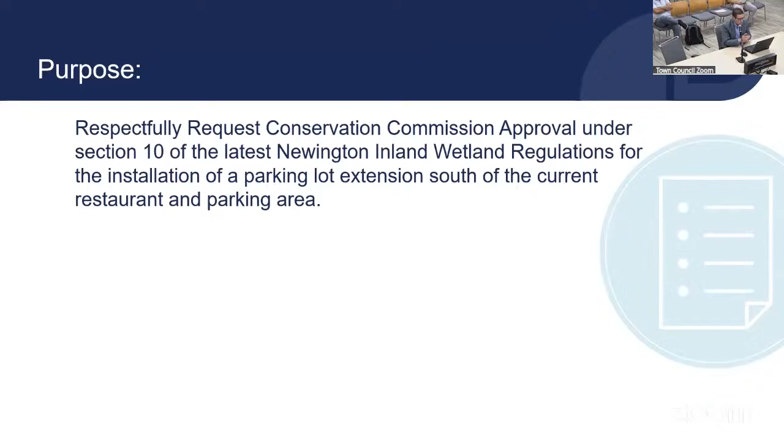Again, for the record, my name is Francis Vacca from the BSC Group in Glastonbury, Connecticut. And again, we are here tonight for additional discussion on Casadoro, Newington, the parking lot extension. And again, the purpose, to reiterate, is to respectfully request Conservation Commission approval under Section 10 of the Newington Inland Wetland Regulations.

Tonight, I am going to go through some information that was discussed at the previous meeting. I'm going to show the added site trees; that was a requirement of planning and zoning for the site, but it's relevant to this discussion. I have tree and wetland opinions. I call them out as an assessment, but they are opinions from the professionals in my company, both a landscape architect and a professional wetland scientist, with regard to the wetland area.

And I will close by briefly updating the commission on the updated parking and the updated wall layout based on conversations and discussions at the previous meeting. Again, we're discussing the portion of the property to the south of the main Casadoro restaurant, the pad site, again, to define pad site, a potential future site that would be usable for commercial development on the Berlin Turnpike, and then the wetland associated with the rear portion of the property.

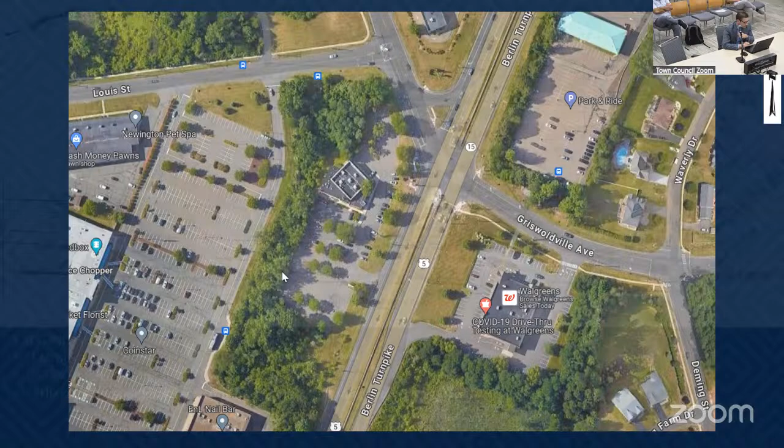The existing size of the site is 3.56 acres with the existing building and 109 parking spaces. And again, the orange line identifies the previously disturbed area. This plan is new. You haven't seen it. All of the circles that you see with the call-outs are identifying the trees. A representative from BSC Group went on site with a GIS identifying device and identified 53 trees that are 6-inch caliper or greater. They're identified as seen on this plan. It has been included in the site plan, I should say.

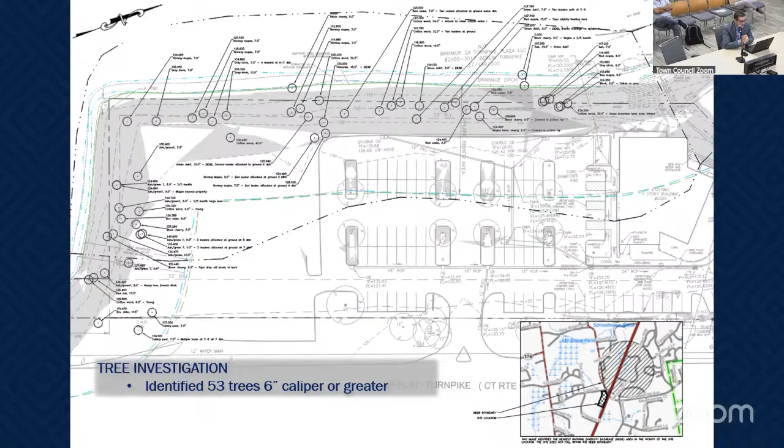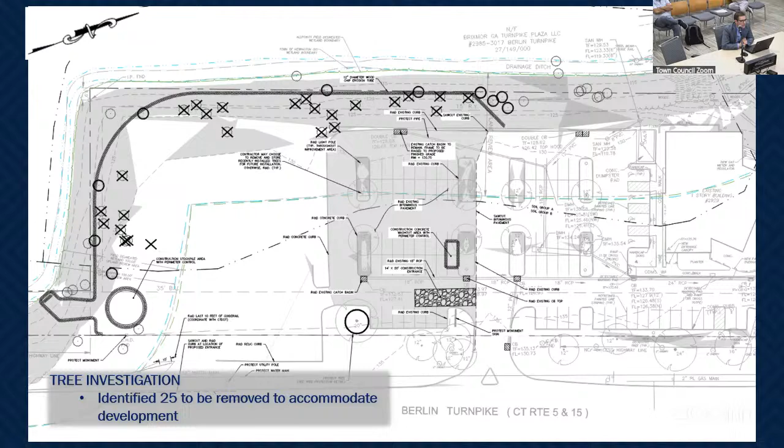For the proposed development, I'll speak a bit further on the design of the wall changes later in the presentation, but we are proposing 25 of the 53 trees to be removed to accommodate the proposed development. They're identified here by the X's. The plan itself shows a bit more information on what those trees specifically would be. There is no specific decision as to which trees. It's essentially the ones that would be associated with the disturbance.

With regard to the wetlands, I have with me this evening Mr. Jonathan Kuziel, who's a professional wetland scientist. He actually was the one that performed the investigation of the trees. So he was out there and took the tree count. But as a professional wetland scientist, I also asked him to provide an opinion associated with his interpretation of the wetland itself to provide additional feedback to the commission.

I apologize, I did not have time to get this email into the record, so I'm going to read it into the record here. And again, I have Mr. Kuziel here as well to answer any questions associated with the wetland itself. So this is an email to me from Mr. Kuziel. To whom it may concern.

The wetland is situated approximately along the northwest perimeter of the Casadoro property in the form of a linear ditch. It functions as a stormwater retention and conveyance feature during rain events and snowmelt from the surrounding development. The ditch appears to be hydrologically connected to both the larger wetland complex south of the Berlin Turnpike and another complex north of Louis Street. Such connections suggest that some of the functions and values of those larger wetland resources may also apply, although in a limited capacity, to the ditched area.

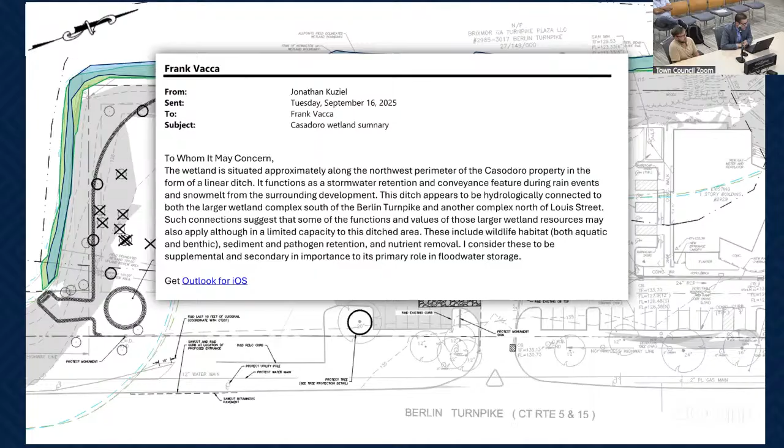These include wildlife habitat, both aquatic and benthic, sediment and pathogen retention, and nutrient removal. I consider these to be supplemental and secondary in importance to its primary role in floodwater storage. I also added one additional email, with specific relation to the trees. I understand that the majority of the concern at the previous meeting regarded the trees. So I asked one of my licensed landscape architects to examine the trees and the information provided on those slopes.

And if I may add this into the record, Frank, this is an email from Tuesday, September 16th from Jesse Harris. He's a professional landscape architect licensed in the state of Connecticut. "Frank, after examining the trees along the bordering slope portion of the site and the proposed design, I would like to offer the following thoughts. As part of the proposed site improvement, several trees within the buffer have been identified for removal.

These trees exhibit conditions that limit their suitability for long-term retention, including poor health, invasive status" — pardon me while I pronounce this — "Ailanthus altissima," I believe it is, which the common name of that is the tree of heaven. It is an invasive species, and there's a large stand of it located on the south portion of the property.

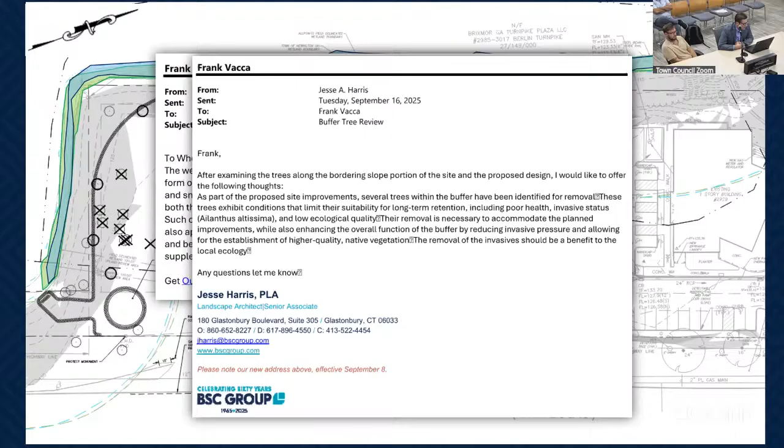"And low ecological quality. Their removal is necessary to accommodate the planned improvements while also enhancing the overall function of the buffer by reducing invasive pressure and allowing for the establishment of higher quality native vegetation. The removal of the invasives should be a benefit to the local ecology. Any questions? Let me know."

I also would like to add that this was part of the original soil assessment provided prior to even meeting in front of the commission. This came from the wetland delineation, and I'm just pointing out that there is a comment provided as far as the class for the wetlands that the understory is generally dominated by invasive species, which I just wanted to bring to the attention of the commission from the soils report.

Commissioner Paswich, I noticed that you have your hand raised. Yes, I want to speak to the tree species. If you know, are there any cottonwood trees on that site in that area you're speaking to? I believe there are 2 to 3 of the cottonwoods in that area, but I did coordinate that with my landscape architect, and he said they are getting close to the end of their useful life and will eventually, if not very quickly, turn into hazard trees that could potentially fall at some point, either to damage any trees that are currently existing there or any potential future development.

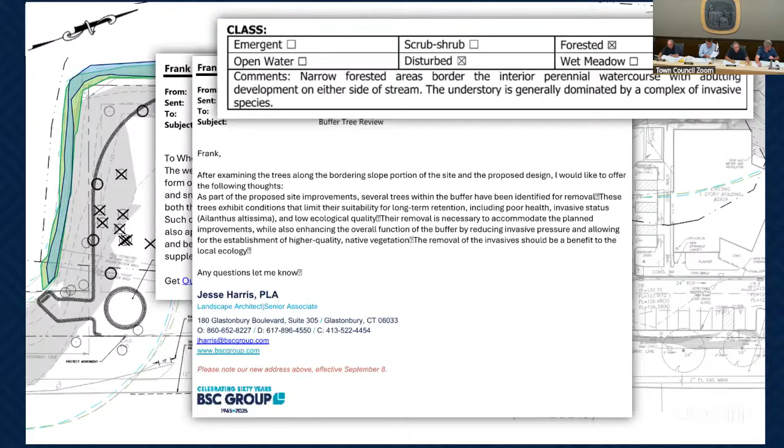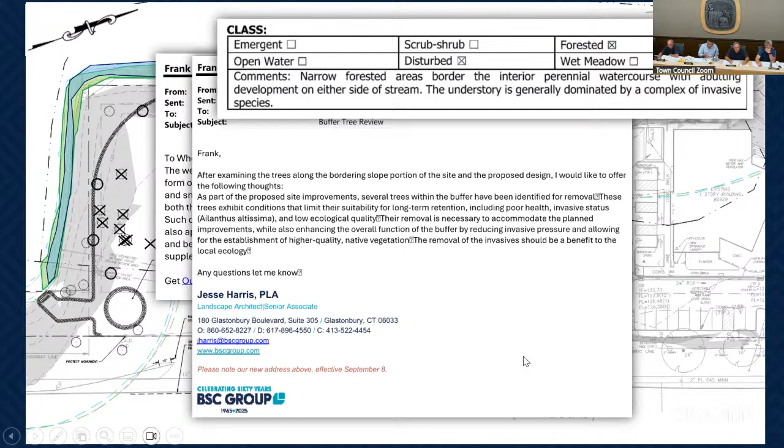Can I respond to that, Commissioner Zellick? So to address Commissioner Paskowitz's question regarding the wetlands, historically, you do have a wetlands report that you submitted with the first session that we had. Do you have this online, this photograph? Yes, I have access to that. Give me one second so I can bring that up for the commission. Sure. I think this will help Commissioner Paskowitz. I have it right here. I will enlarge this area.

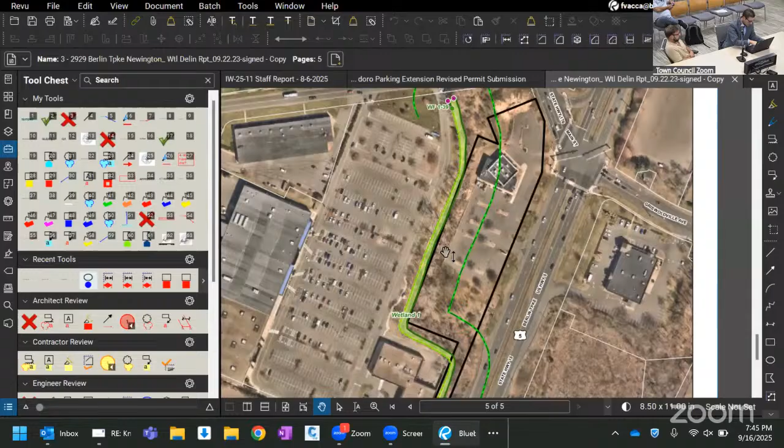Okay, so for all intents and purposes, the Berlin Turnpike, let's assume it runs north and south. Across from the Casadoro property, just to the southeast, there's a large wetland on the other side of the Berlin Turnpike. So my assumption is that wetland exists because of the Candlewick neighborhood slopes. I believe Commissioner Siddell, you live in that area. Yes, I do. There are some tributaries that probably run into this larger wetland down on the Berlin Turnpike. And I would assume that a lot of this area was wetland at one time, if I'm just looking at this map and I see that isolated wetland that's there now.

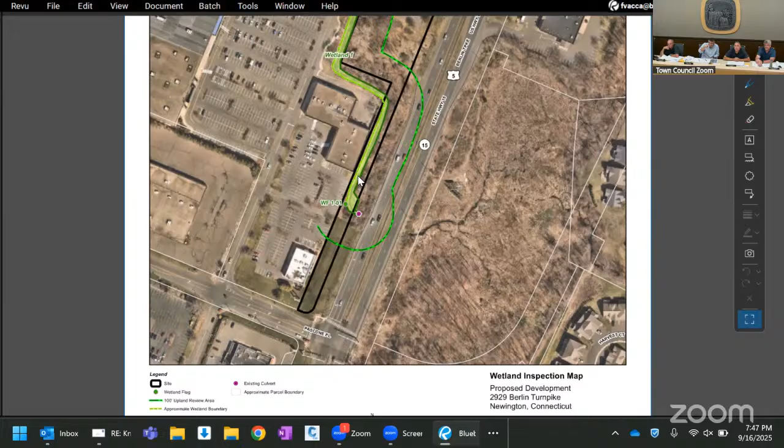And I believe it looks like there's a major artery. If you could just scroll back down a little bit. It looks like there's an artery in that wetland that crosses under the Berlin Turnpike and then becomes this what we're calling a connector that goes out to, is it Churchill Park area? Churchill Park area, Clemwood complex.

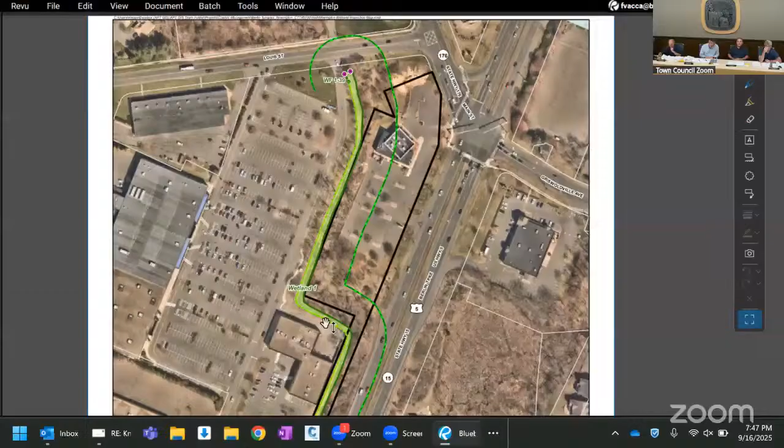So just for the commission's benefit, I did visit this site behind the laser tag. I pulled into that area and I could see that brook, and it was as described in the wetlands report, about 5 feet wide, 6 to 16 inches deep, with running water through it. So for all intents and purposes, it's a brook. We're calling it a connector. There's no name for it. It's not a named water course. But it seems to connect that wetland on the eastern side with that water course that runs along the Casadoro property, and then under Louis Street. So it is a flowing water course, although it does also serve the purpose of flood control from these developments that surround it.

Can I speak briefly on the history associated with that area? My understanding, based on information provided to me by the previous owners of the property, Mr. Rod Mortensen and his family, this was the former location of Mortensen's Dairy. Based on his anecdotal information, it was his understanding that in approximately 1951, this area was essentially filled entirely. So I do not have any historical information on the wetland complex in the area, but I do know that this area was manufactured in or around the early 1950s associated with this development.

And it's understandable to see that based on the rectilinear shape of the wetland area, because it essentially hugs the slope associated with that development. So this area was previously filled for that. I just wanted to set the historic understanding based on the information provided to me by someone who previously owned the property.

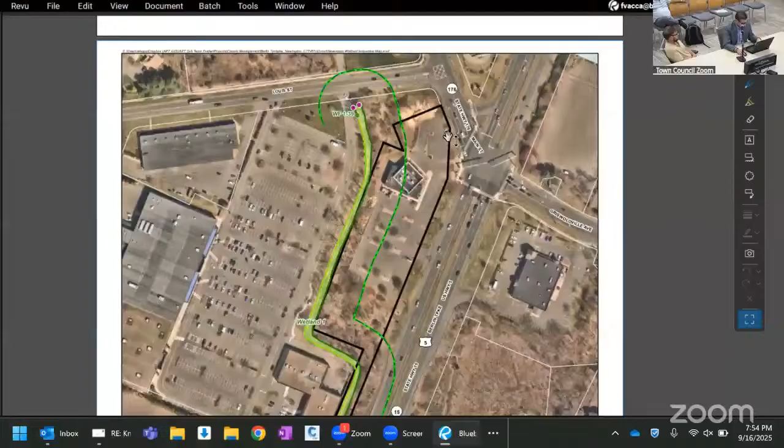Thank you. All right. I see Commissioner Siddell has his hand up and has been waiting. Thank you, Chairman Zellick. Question for Mr. Vacca. I noticed you mapped the trees that are a certain diameter, you marked them on the map, but you said you're not sure which trees will be cut down that will be associated with the disturbance. Can you rephrase that? Hold on one second. I'm going to share a blow up of the actual plan itself as opposed to my presentation, because it will be easier to understand what's actually happening. Give me 1 second here. All right.

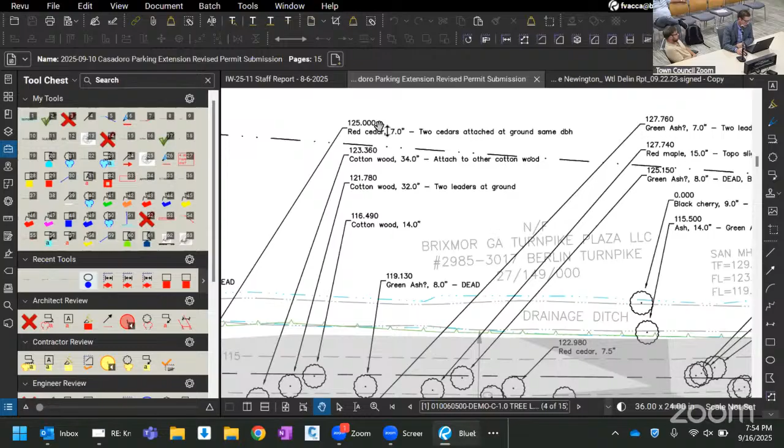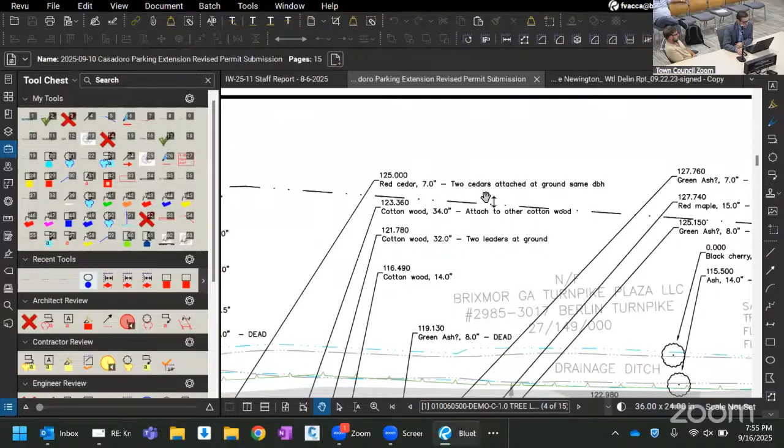All right, so some of the trees that were identified, I'm looking on sheet C 1.0 here, which is the tree location plan. What is being identified on this plan, you can disregard the top number, which is essentially the elevation associated with where the shot was taken, but the description describes what the tree was identified as and what the size was. So red cedar, 7-inch, that's a 7-inch caliper, and additional information on the 2 cedars attached at ground, same.

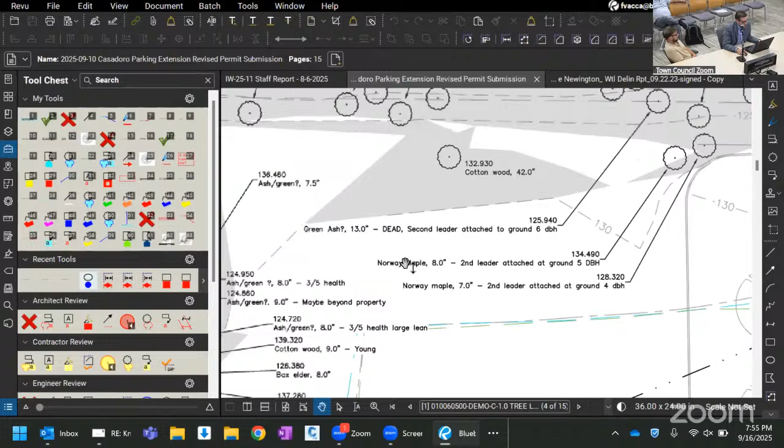So basically the main portion of those areas that would be removed are the areas associated with the proposed development. For example, Norway maple, green ash, those are the ones correlated with those X's that will be removed as part of the proposed development. We have pulled back some of the wall, and I'll talk about that in a bit, but those are the trees. What I meant in my phrasing was that there was not any specific decision to select any type of trees particularly for removal. It's essentially the trees that have been identified that are larger than 6 inches of caliper. Those are the trees identified on this plan that would be removed.

Now, I would like also to make note of another item that both my landscape architect and the soil scientist that did the original report noted: there is a substantial amount of invasive species on this site. Essentially, the information provided in the soils report identifies that the majority of the understory area is all invasive species. And correct me if I'm wrong, I believe that a number of the cottonwoods on site are also, I wouldn't say strangled, but there is evidence of vines and poison ivy and other growths that are essentially growing off of those larger trees.

And again, what I'm trying to reiterate here is that a large portion of this site that is in the quote unquote forested area is forested with a majority of invasive species that are considered hazardous to the habitat and the ecology of this area. And it is the opinion of my professional landscape architect who does these designs. They may not necessarily be an arborist, but they are professionals in our field that we utilize often for advice and information with regard to tree species and how these plantings work, for lack of a better phrase.

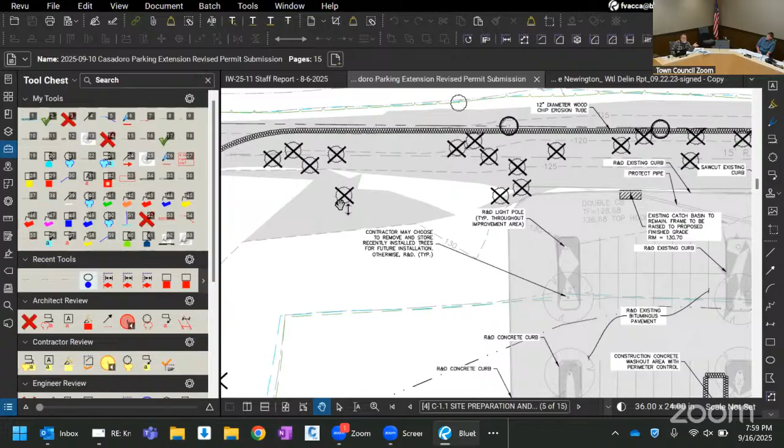Chairman Zeller? Gentlemen, I think something we should think of at the moment: Frank hasn't finished his presentation. There's other information he needs to share with you about the wall, for instance. Okay. And I think we jumped ahead with the question and answer session before we finished what Frank had to say. No, I want to continue. I'd like to continue. I see two hands. I've got Commissioner Paskowitz and Commissioner Sadell. I'm gonna let them speak and then we'll let the applicant continue his presentation.

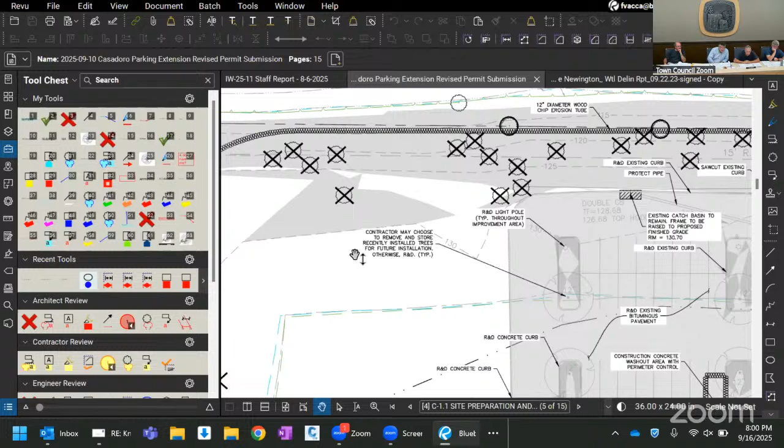So Commissioner Paskowitz. Yes. From my knowledge and background and understanding of invasive species, not just in Connecticut but across the board, eradicating trees and forest that are surrounded with it will not cause the invasive species to leave their roots. There is no way to eradicate invasive species. They come back. I don't care if you're in Georgia, South Carolina, Connecticut, Maine, Canada. They keep continuing because the winds and hurricanes from other countries keep bringing in these seeds. And not only that, the ships coming in the St. Lawrence River carry these seeds on board. We're not going to eradicate this area by cutting down trees that are surrounded by invasives. That's a moot point. That's all I have to say. All right, thank you, Commissioner Paskowitz.

Commissioner Sadell. Okay, one final question. I hear what you're saying, Mr. Vacca, but I'm interested in knowing what your landscape architect says as far as restoring this upland review area. If we remove all these trees that are on this plan here, I assume that's a done deal. All the X's will be removed. What is the mitigation plan or restoration plan? That's my final question. I just have one comment about trees. We'll let Mr. Vacca respond to Commissioner Sadell. There is, that's part of my presentation. Well, I can show it over here. I'll zoom over to the planting plan.

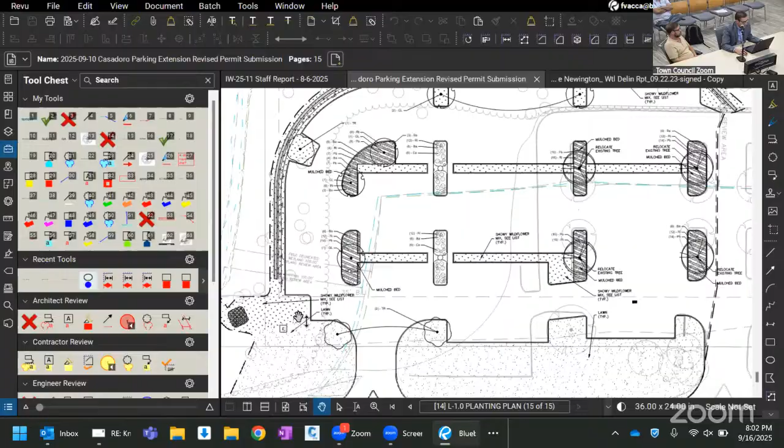We are showing a restoration as part of the planting plan. We are not providing the same number of trees that are being removed, we don't have the ability to do that, but we are satisfying the requirements associated with the zoning regulations. And what we are offering is that a lot of the lower grassed areas throughout the entire developable area here, where the wall is being placed, and disturbed areas associated with the wall, we are replacing with a pollinator mix.

So it's not going to be a mowable mix. It's essentially a wildflower mix that is intended to work with the local habitat, and in particular pollinators, to provide additional support to them. And again, not have additional maintenance associated with it.

And then the tree species are all native to the state of Connecticut. All of our projects are designed for that, and those areas where we can place them in the development and still satisfy the requirements for parking and for landscaping, we have placed them as identified here. The only islands that they are not currently located on are the water quality islands that are currently used for the stormwater management of the new proposed parking area.

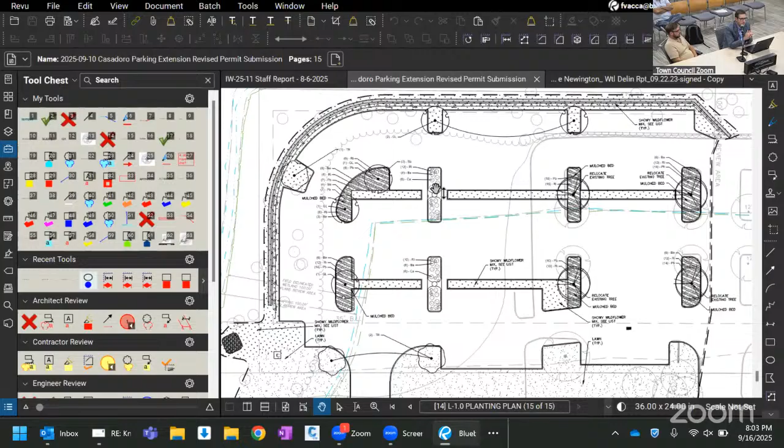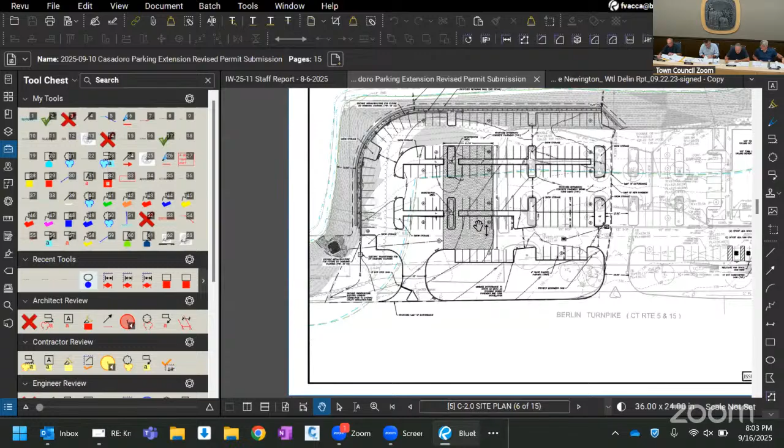Okay. Commissioner, one comment before he continues with his presentation, just because we're talking about the trees. I'm looking at C-1.1. And I see all the trees with the X's, but the trees that you're proposing to leave, the majority of them are right in the middle of the wall, so how would those trees remain? That's not the location of the wall. That's the location of the perimeter controls. So the perimeter controls are downslope of that. Those perimeter controls, although not necessarily coordinated with the location of the trees, are down gradient from the proposed wall installation.

Talking about the erosion and... Yes, the wood berms and so on. I apologize for how that's not clear. Yes, I understand. It looks like that's the new wall. That is not the wall. The wall is upslope of that. I thought this was the wrong one. No, that's the perimeter. So you're saying the wall is uphill from that? That's correct. So the wall's got to be up here somewhere. It's just not on this image. That's correct. On C-1.1. Yes, I apologize for the confusion on that plan. That is not the wall. That is the erosion berm.

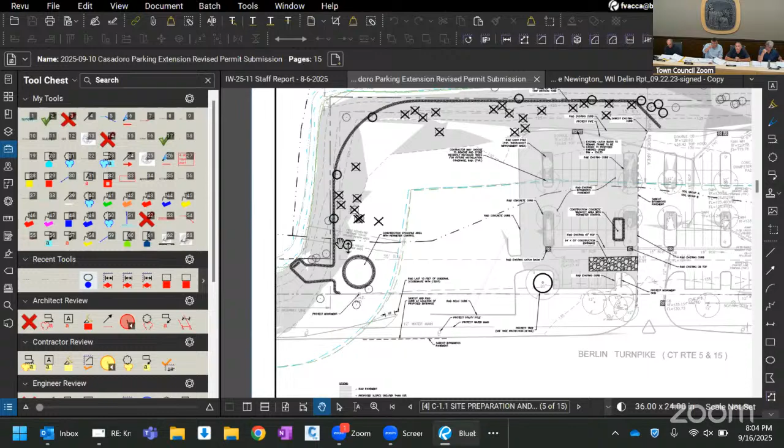Okay, what is that right angle then? Just move your cursor up to the upper left-hand corner. Right up here? Yeah, that right angle? Is that the wall? This is the property line. That's the property line.

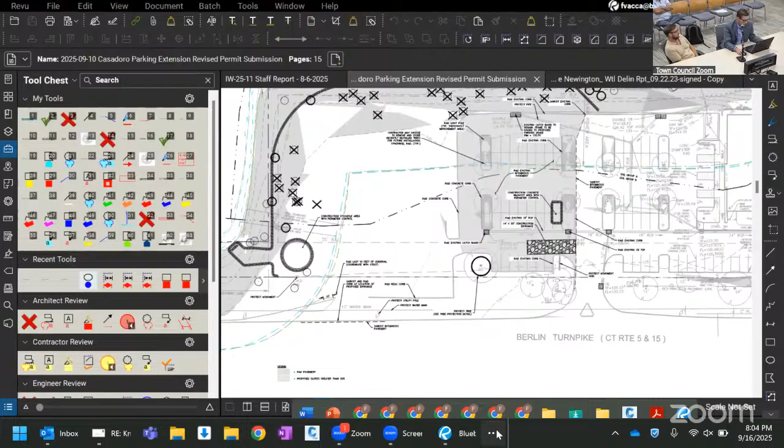And so, as long as there's no other questions, this would be a good time for me to transition back to the presentation to talk about the changes that we've made with regard to the design. Okay. If this will take back over. There we go. All right.

So the change that we made is, if you will recall from the previous design set, this wall used to continue over through here, angle over, and then come over. What we have done is we have pulled back the wall, and we've pulled back the design of the parking lot area to essentially curve this wall around. We've provided, I think it's close to 16 to 18 feet of reduction in the wall location here. And by doing that, the original height of the wall in this area was 18 feet. We've been able to pull the wall back down to 12 feet.

One thing, and I'm going to bring this up at this point because it's relevant. The main reason we have not looked at moving the wall any closer or removing any additional parking to try to pull the wall farther away from the property line is, I would like to reiterate that this is still considered a pad site. It is still a commercially buildable site. There is not any intention of us at this point building anything in the future. However, this is still a buildable pad site for the developer.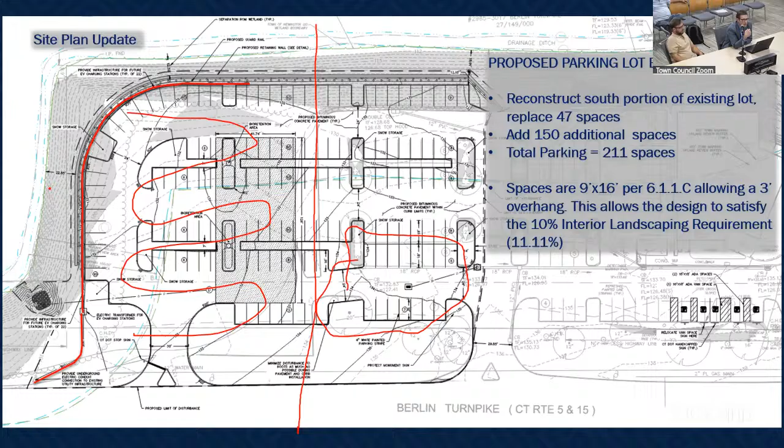We had originally proposed this to be straight, but because this was a previously approved site plan, we do not have the ability to modify the pavement in this area because of its non-conforming nature. So we have the ability to make modifications to the pad site area and the portions around that, but not major changes to anything associated with the main development itself.

Are you saying you don't need TPZ approval for this proposal? Yes, we do need TPZ approval. I'm going in front of TPZ hopefully next Wednesday. Or you're saying that you just wouldn't want to approach them on this other portion here? The portion on the top up here? It has not been discussed or proposed.

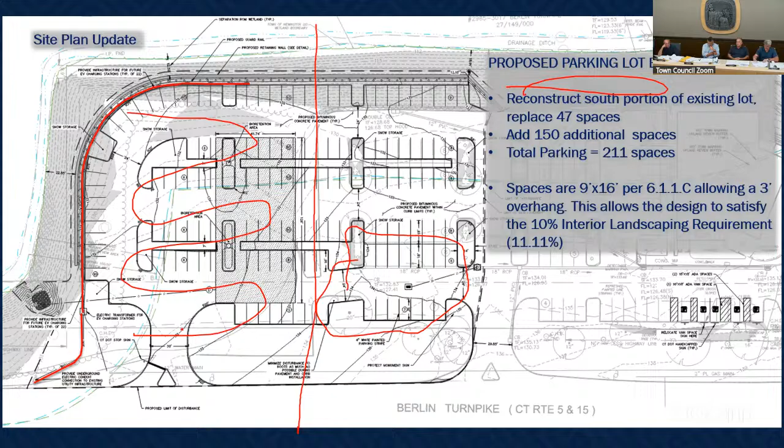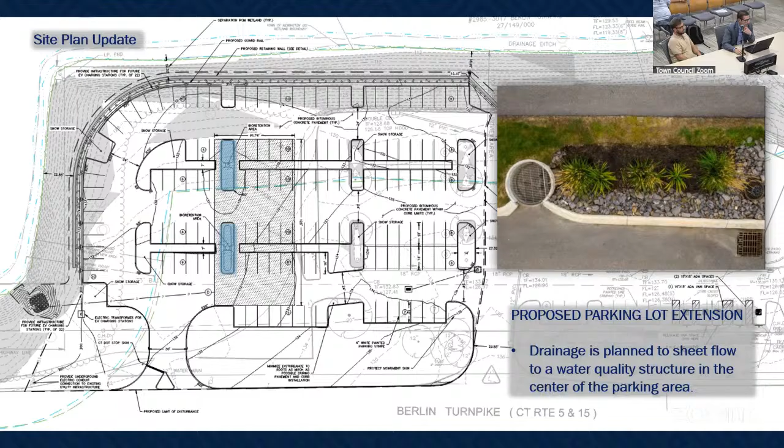Okay, before we take any more comments from commissioners, is there more to the presentation that we need to see? The only other slide is just the fact that the drainage associated with the development has not changed. The only main difference is we have increased the landscaping area by about 2%, so we went from 11% up to 13%. The remainder of the drainage design is the same, and I've already presented that at previous meetings. That's essentially the changes that were made and any additional information that I wanted to provide to the commission.

Frank, I think it's important to mention that this change to the wall, where it's now radiused in the southwest corner, reduces the height of the wall from 18 to 12 feet. Yes, I did say that. Did you? Yeah, I did. So I must have been sleeping.

I do have a question, Chris. At the last meeting, I had asked you how far back they would have to pull the wall to not impact the trees or the property owner on the other side, and you responded 4 to 9 feet. So have they pulled it back 4 to 9 feet? Not uniformly, no.

If you look at the effect of changing the wall to the radius, you benefit substantially by pulling it away from that corner. I want to make sure that pullback is addressing those issues that you raised in your memorandum. I like this design much more than the previous one. Right, but does it address those issues? I feel it does, yes.

Was the wall pulled back on the west side? Only here, in the radius. And just to make sure, the west side is the top of the page. Top side. This particular wall cannot get pulled in any more because of the way the parking is laid out, and especially because we do not have the ability to make any modifications to the parking in the frontage over here.

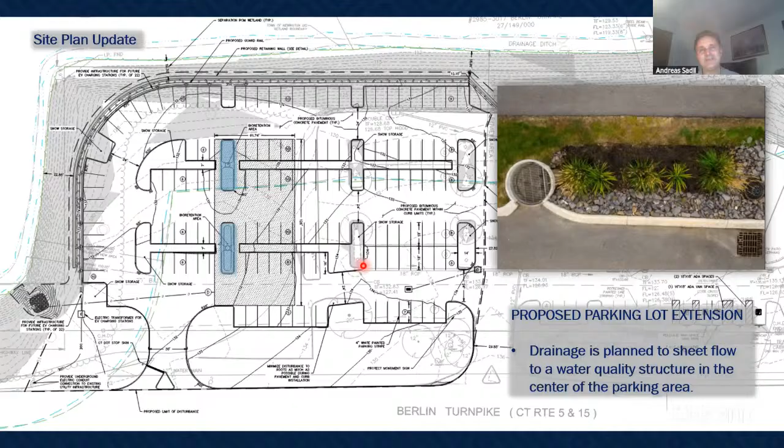What type of foundation are you gonna need for that wall? You had your little cross section there. How deep is that foundation into the ground? How far down from the parking lot level are you gonna have to go to create a foundation for this wall that you have here on the right-hand side? How much soil removal do you need for that?

Soil removal for that, again, because we are proposing, and so I'm clear and on the record, the detail that's being identified right here is a generic detail. It's not the exact detail. Again, we haven't finalized the type of product that we will be using.

However, for a modular block system, the benefit of the modular block design is that there's not a substantial amount of additional wall needed because they allow for the installation of the tiebacks, which basically are geotextile biaxial geogrids, fabrics that are installed into the slope to allow for the wall to support itself versus having a great big massive foundation buried underground that you can't see.

So there is going to be removal of the material to allow for the installation of the wall, but it's only what's required. In fact, we're doing a project in New Britain where they dug a trench to install the bottom of the wall and installed the remainder of the wall prior to removing the slope adjacent to it, so that there wasn't a great big massive excavation required to get the wall installed. So it was a unique situation that I observed.

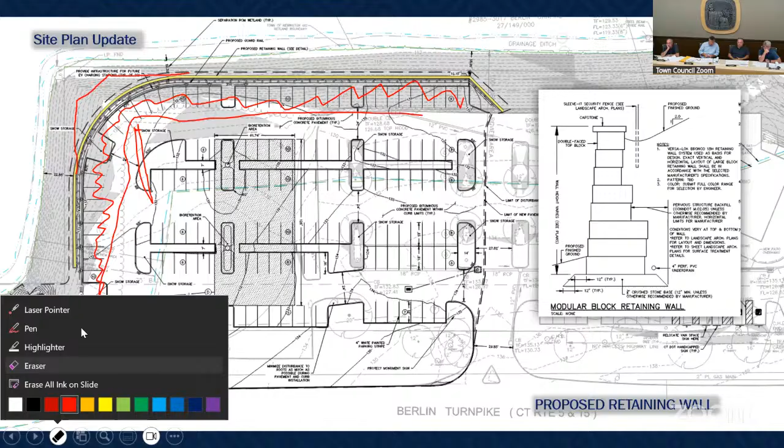All right, I'll go to Commissioner Paskowitz. Thank you, Chairman Zelik. Listening to Commissioner Sadil, Bashan, and yourself, you're touching on all the sensitive issues and things that could contaminate wetland, and I appreciate your input. You're right ahead of me on all of this. I want to thank you, because I'm also concerned about wetlands, as you know, going way back in time.

And water quality, of course, which is most important, and intervention of contaminants in the soils, which can percolate into the water table. We don't have many wells around here, but it all percolates to the system. The system goes to the reservoir down on Long Island. It's a large scope of movement. So every little place that we try to protect from intervention of pollutants is important. That's my input for now. Thank you. Thank you, Commissioner.

Chris, other commissioners online, because I can only see Commissioner Paskowitz and Commissioner Sadil. I just want to make sure that no one else is waiting with their hand up.

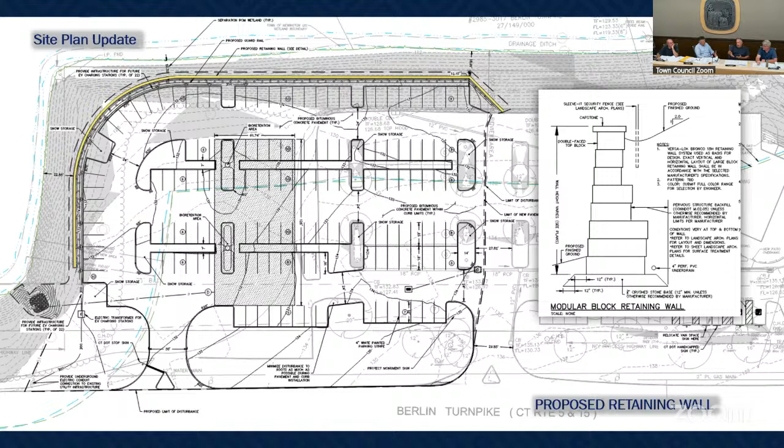It's going to overflow. And my biggest concern is the future of its physical ability to function as it's functioning right now. I don't think it could handle any more encroachment. I'm sure it's been moved and pushed and manipulated to where it sits today. And I understand it's off of the subject property, but I honestly don't think it could handle this type of encroachment. Go ahead, Commissioner Paskowitz.

You just touched on something, John, that I didn't think of, the impact on the water course. Is it an intermittent water course or is it a flowing water course? That's my question. My observation is it's a flowing water course. Water's coming from that wetland to the west. There's a large wetland on the other side of the Berlin Turnpike. It crosses under the Berlin Turnpike. It's a flowing water course, approximately 5 feet wide, 6 to 16 inches deep. If you look in your packet, from the first meeting that we had, there's a wetlands report in there and it'll describe it.

Well, let me just get back to your observation. Where does the water course move to from that area? It flows north, passes under Lewis Street and then out to the wetlands behind Churchill. Oh, out to Churchill. That was an area that we were in discussion with on the landfill application some time ago. Yes, I'm well aware of that now. Thank you for filling in the mapping of that water course. So Commissioner Bashan, you brought up the potential of that being impacted. And everything we look at can be impacted.

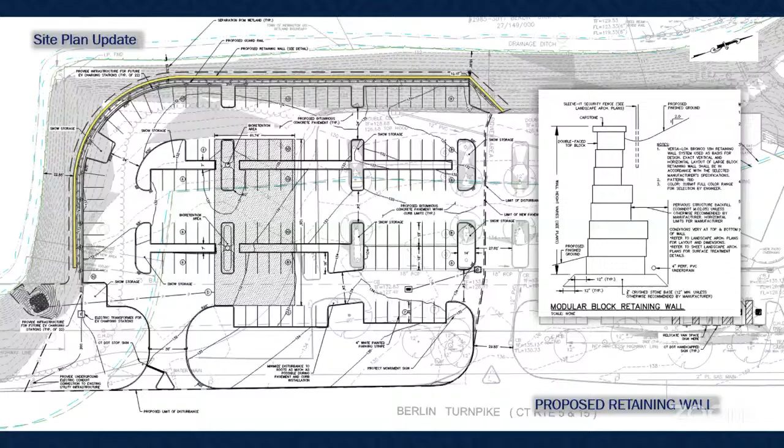During the construction or? No, well, during, I don't see how you avoid it. You're 10 feet from the water course, or maybe a little more at the closest point. But also I'm concerned about the future of it. Yeah, and again, to follow up, we don't have a third-party environmental scientist report. There's no environmental impact analysis that's been done here.

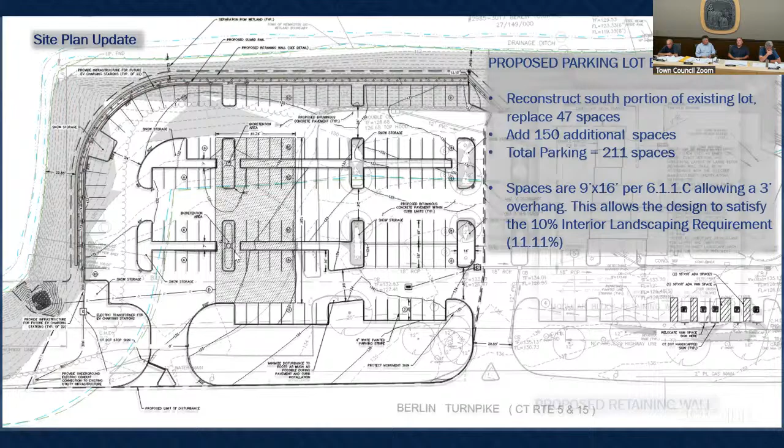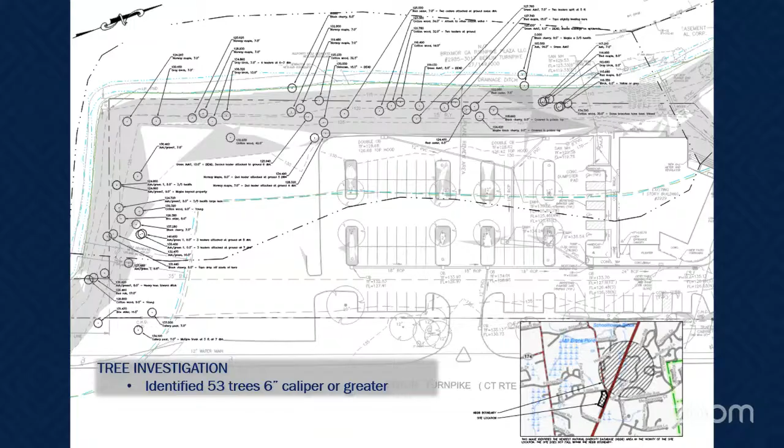So again, my concerns are more of the physical characteristics, what's going to happen post-development, the stress on that water course. Yes, I see where you're coming from, and in my mind I can see that area being impacted. And I'm also concerned about that and measures that should be taken to protect it completely from any intervention during construction, post-construction and ongoing. So that's my comment. Thank you.

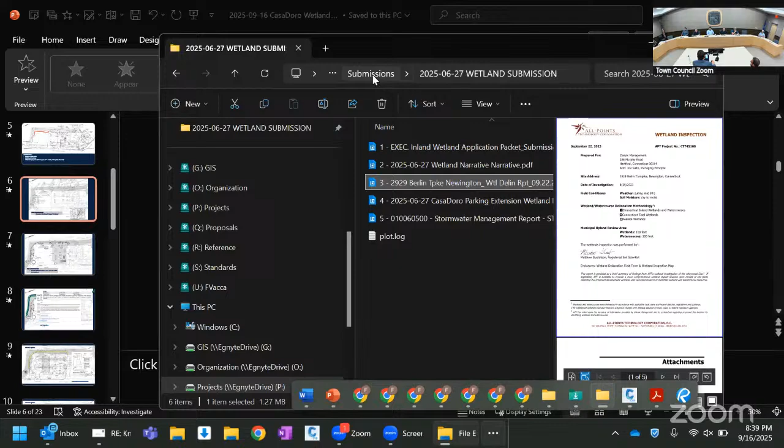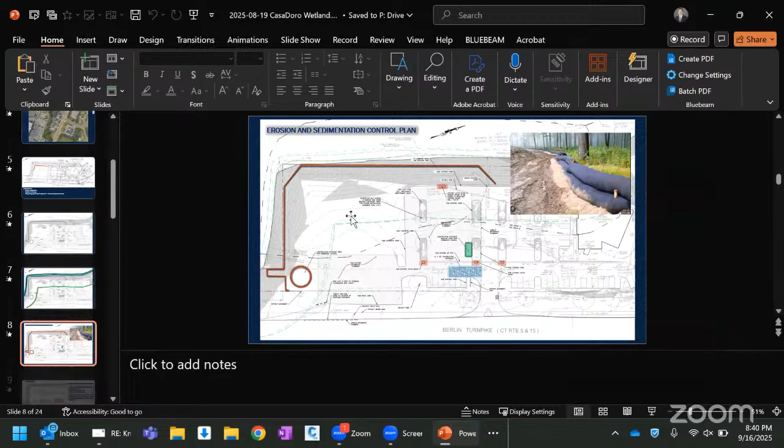Right, and Commissioner Paskowitz, you can certainly view that water course from the parking lot. You don't have to go onto the applicant's property. If you go over to Laser Quest, you can clearly see it from the parking lot. I'm not familiar with Laser Quest. Okay, well, if you look at the site plan and you see the address, you'll see the parking lot where the Price Chopper is. Yes, sir. Right, so from the Price Chopper parking lot, you can observe that water course.

And I want to follow up on something that Commissioner Paskowitz said earlier regarding the commission being business friendly. We do have a track record of pretty much approving every application that comes in front of us. For the many years that I've been on this commission, I can remember only one application that was not approved, but generally all applications get approved

when the applicant works with the commission to come up with a design that is acceptable to the commission. So there's usually a little bit of push and pull and compromise. And then we typically approve these types of applications if modifications are made which are acceptable to the commission. So I'm just gonna throw that out there and let it lie. Any other comments from commissioners?

I agree, Chairman Zelik. I agree with you 100%. Just if I could add on to the business friendly part, to the owner of the property and to the restaurant group: my wife and I really love your work and your facilities, and we've probably been to at least 3 of them, 10 times in the last year alone, between Wethersfield, West Hartford, and Newington. So I hope we're still welcome.

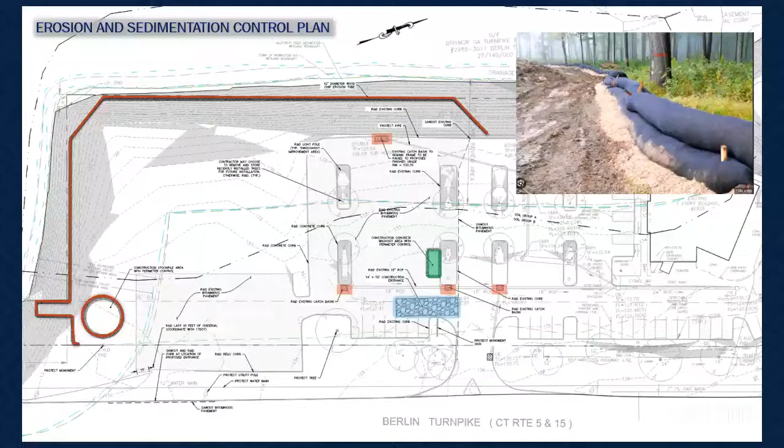I'm trying to anticipate. All right, I provide a wetlands values report, but it's following the requirement, because the functions and values is the Army Corps of Engineers requirement, correct? Right. Yes. Would you mind, because he knows what he's talking about. The highway methodology is used. I often use it when I work on transmission line work, when they are impacting a wetland. It's pretty much a checkoff list of the values and functions that the wetland offers, and it's a report stating what the wetland offers to the public. So could you do a version of that in a pre and post development condition? I haven't done that type of document. I'm not sure what that document would be called.

Because the difficulty you would have with something like that is, and correct me if I'm wrong, the point of the functions and values is I'm going out and examining it and this is what is actually taking place. There isn't a way to speculate, all right, this is what's going to happen if we do this. Could this be what would happen if this part of the slope fell into the stream and totally screwed up what could have happened? I'm not trying to push against it. I don't know how to provide something that is factually based. Does that make sense? Yes, it does to me. I'm trying to find a way for you to answer his question. Right.

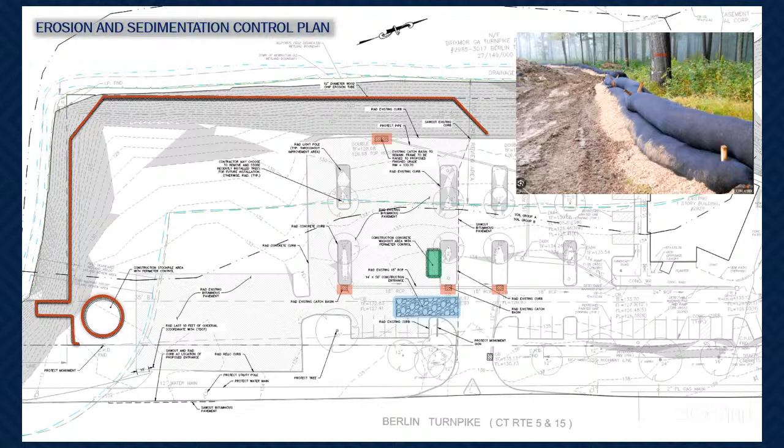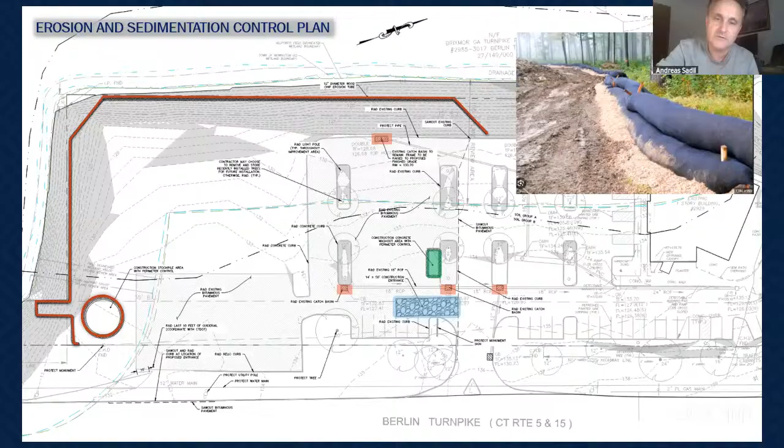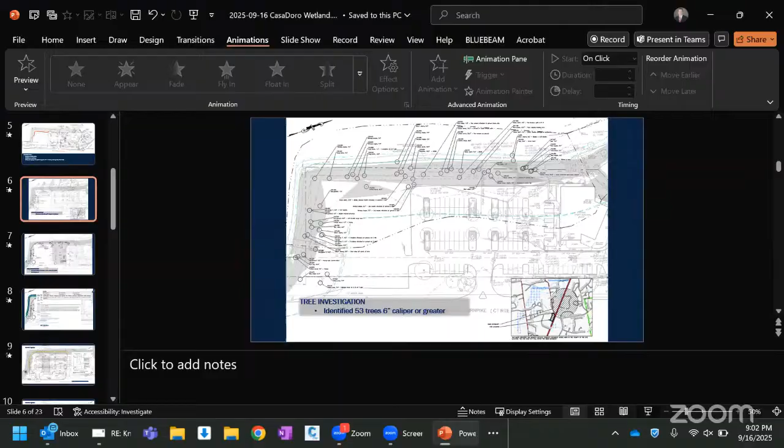Mr. Chairman, if I may? Go ahead, Commissioner Saul. There's two things that are still front and center. Again, I'd like to know post-construction, what's that upland review area going to be between the wall and the wetland? What is that going to look like? What does your landscape architect propose? What's going to stay? What can be added to minimize the impact to the wetland? What is that impact? What's going to slow the water coming down that slope?

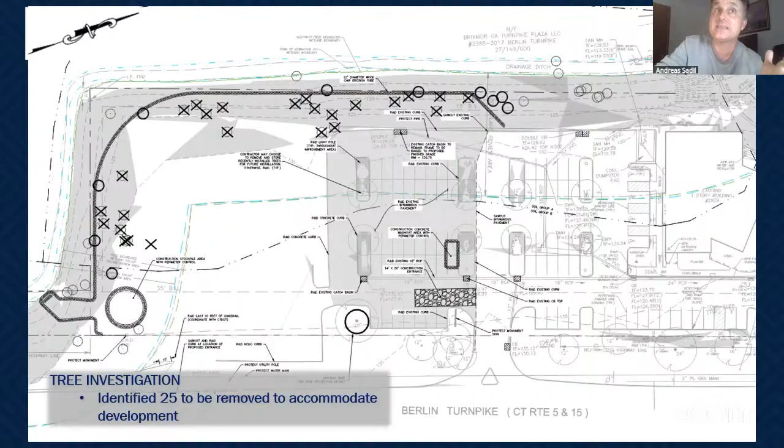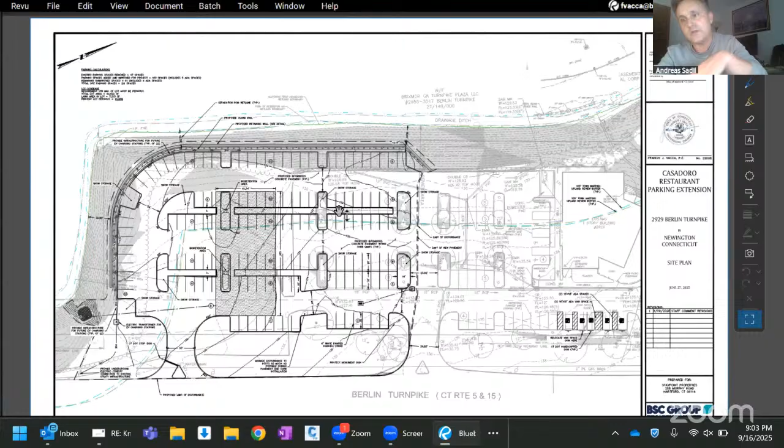Is any mitigation there to stop the water from just running right down into the channel? Is there going to be erosion associated with that? I don't have a clear picture of what that plan would be post-construction and its impact to the wetland, hopefully neutral or minimal. But what's the plan there? Okay, keep your wall where you are. What's going to stop the velocity of the water going into the canal? Are we going to have erosion issues? Second, again, I keep harping on the wall.

I get it, but it's sort of like the cart before the horse kind of thing for me. What exactly are we talking about? Notionally, okay, how big is this trench? What's that fill going to be to get that level so you can drop a wall onto that platform, if you will, foundation, given the steepness of the slope, as we mentioned before. I mean, you're right to the edge there, and it's a very steep drop off. So we're going to have to see what type of fill is going to be required. That's going to have to be engineered.

And since it's directly impacting the upland review and the soil removal, I think we need to pay some attention to that. Commissioners need to see that in their minds, a vision, what this will look like, what it's going to take to get this accomplished. Thank you.

Question for Commissioner Sadil. Are you asking for sections along the wall? Would that do it? I'm looking for a basic section, a basic cross section, you know, what is it? How big is this trench going to be? What's the fill going to have to be? Where's this fill going to come from? Are we going to need a bulldozer to come up there and level up the soil? Now, I don't have to have the whole detailed plan, but at least an outline or a preliminary scope of work. I think that's fair.

Six or eight sections? That's fine. Could you do six or eight sections along the wall? Even one or two, just to give us a notion of what this is going to be, because it's more steady. The lines are consistent when you go around the bend, vertically to horizontal. So what is a notional cross section for this site going to look like? I'll let the applicant decide, but that's what I follow.

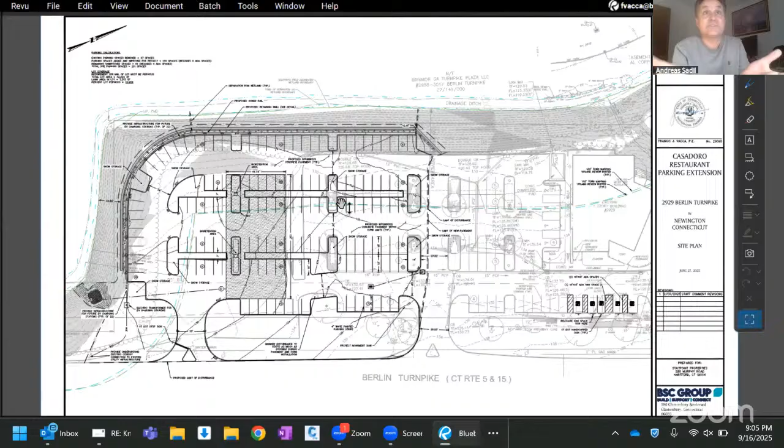You have to have a print. Yes, the builder's got to have a print to work to, right? They're not going to just go out there. They need a plan in front of them so they can give the engineer, give the architect, what are you looking for? So the problem here is this is a cart before the horse request. Typically, a full engineered plan for the wall doesn't come until they're ready for a building permit, as opposed to this level we're at now with the applications to a land use commission.

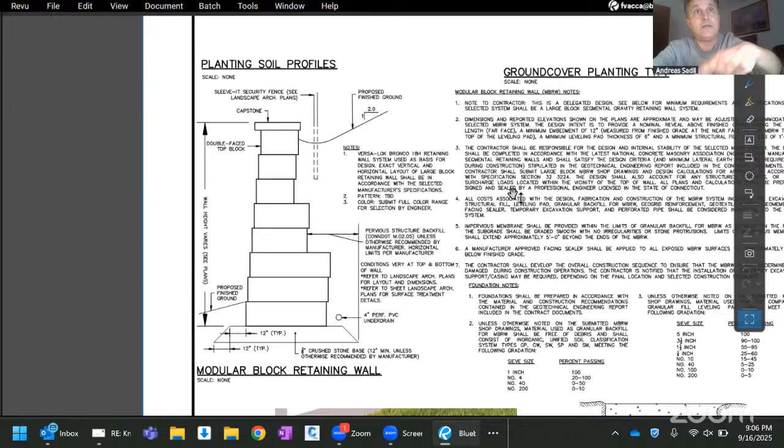Usually that is the case, but this is a direct impact to the upland review area. I understand that, but that is soil removal in the upland review area. That's fair game for the Conservation Commission. That has to be planned in advance. Maybe that should have gone first, then come to us with the detail. I think that would have been a smarter way to go, in my opinion. So if you took your generic detail here and picked a few spots along the wall to do a section, carried out to the edge of the wetland, I think that would answer Commissioner Sadil's questions.

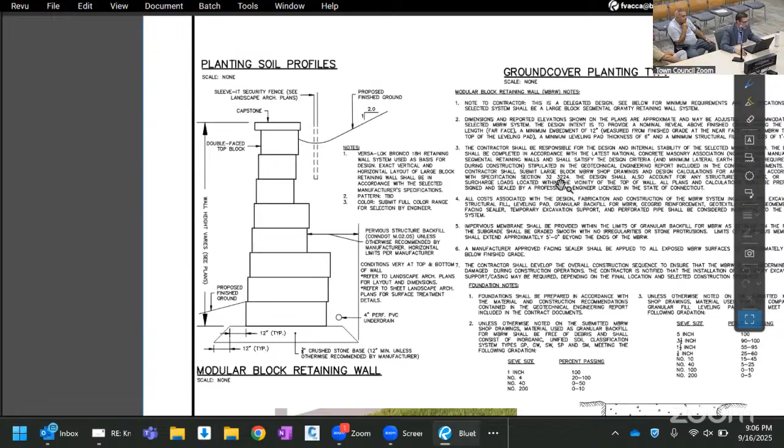I see what you're saying. It's potentially possible. The issue I'm trying to wrap my head around is, number one, the time frame, and number two, where it's tied to the requirement and the regulations.

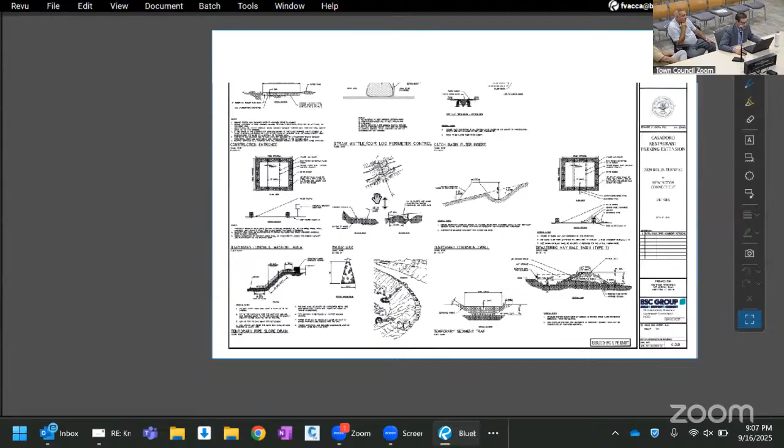If I may answer your question with regard to the stormwater, Commissioner Sadil, if I can jump back over to here. Let me move this out of the way. Right now, as it stands, essentially this portion of the property runs overland into the stream. When our project is finished, let me go back here.

This will be what will run overland into the stream. We are substantially reducing the amount of overland flow that would be running to the stream. As far as the detention associated with every single project that I submit to any commission, it reduces the peak discharge for every storm, 2 through 100 year, as a result of the detention system installed below grade here. So as it rains on the site, all of this rain makes its way into the detention system, which holds it during the storm and will slowly release it.

It releases it in an outlet here, but this outlet, so in other words, what this is doing is essentially swap my design with a great big giant forest. I'm not questioning that. You've got this down, Mr. Vacca. I'm not questioning that.

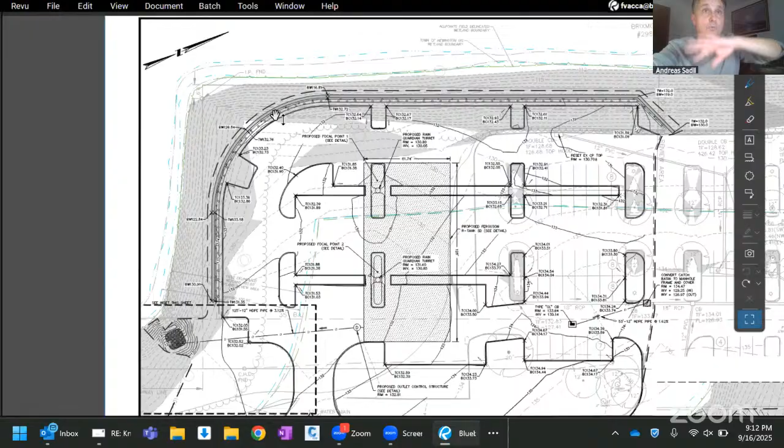So all I want to say is, show me post-construction, if the slope is not going to be altered beyond the wall, that's going to stay as steep as it is today. Even with all that filling you're going to have to do for that wall, that slope is going to be the same as it is today. Yes, that's what I'm saying, because the wall takes the place of the slope.

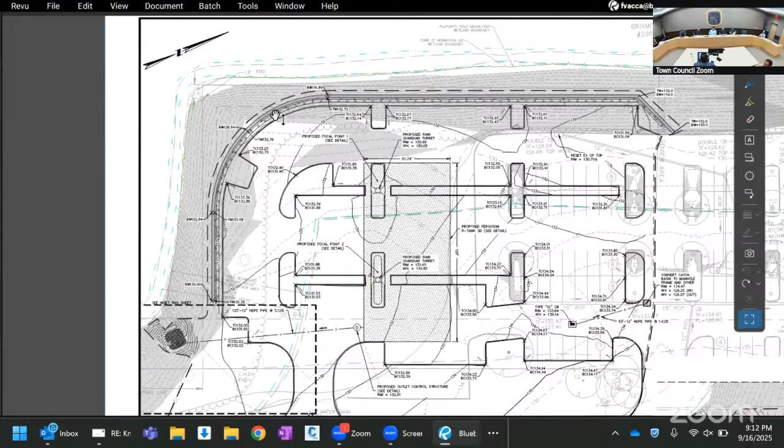Now, how much are we going to have between the edge of the wall and the edge of the wetland? I'm sorry, how much is what? Between where the back of the wall is and the edge of the wetland? How many feet is that to get from the back of the wall to the edge of the wetland? At the narrowest point, it is approximately 12 feet. I don't have that identified on this. I have it right here. At the narrowest point, it's 12.3 feet exactly.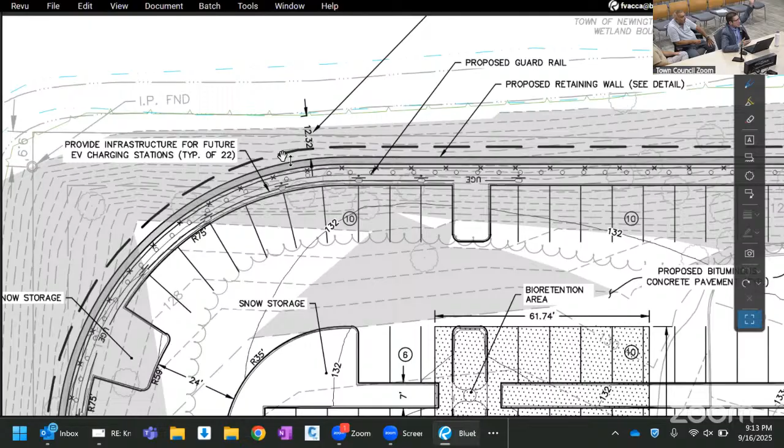But again, please bear in mind that the grade is directly correlated to that distance. So in other words, it's not 12 feet flat at 8 feet high. It's 12 feet at a slant. It's basically a hypotenuse, if you will, right? It's a slant, it's a grade. Right. Well, what can we do in that 12-foot zone?

And that's where you land. Well, that's going to be a lot of work. How much is it now? So we're going to shrink it down from how much gradient, 50 feet to 12 feet? What's that delta, what are we starting with? But that's what I'm trying to say, we are not changing the slope of the existing. So here, if I'm going to draw in the side here. The point is that the wall is going to encroach further down slope to get your parking spaces, right? Right.

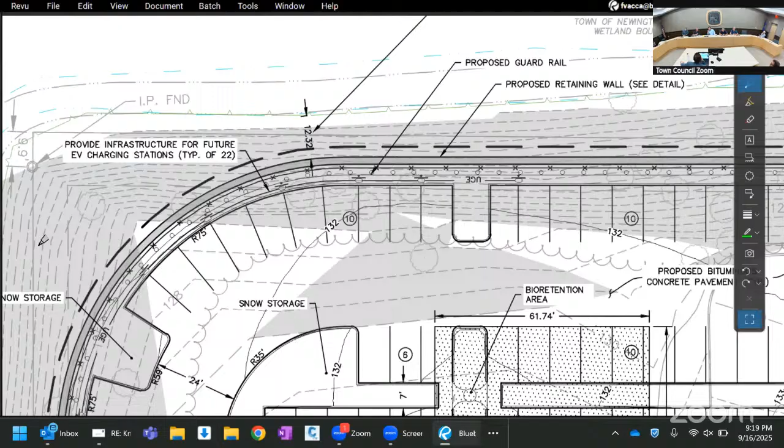I'd rather make the motion to allow them to go forward. It is a pre-existing lot. It's always been a lot. This is not some native forest. This is a lot and we're just going to bang it together against another lot and there's a culvert in between. They're going to clean this up and reduce the amount of water going into the culvert, into that drainage ditch, I guess you would call it drainage ditch. And I think that's a better plan than what exists now. I think they're going to handle it better with your improvements than if it just sits there.

Then I'll just make my final comments because it looks like... Well, we'll make comments after we make the motion, before we go to vote. Well, my final comments, like I said, I think this is just too much development, too close to the wetland. So we're encroaching 90 feet into the review area, within 10 or 12 feet. So say 80 to 90 feet. And it's just too massive of an infrastructure, in my opinion, on an already stressed water course. So that's my opinion. So just so you know, if we do vote tonight, you'll know the reason. Right, we'll discuss that after we make a motion to go to vote.

So, if I just might add, we're all for you expanding parking, just the plan before me is... I'm gonna go back to my original comments. Up to the edge of slope, you want to build a parking lot, that's not a problem at all. This becomes very complicated once we start to put in this retaining wall, all this fill, removing all the vegetation from the upland review area. Very invasive project. So from edge of slope, not an issue at all as far as parking. So I'm in agreement with you, I'm not opposed to any kind of parking. That's fine.

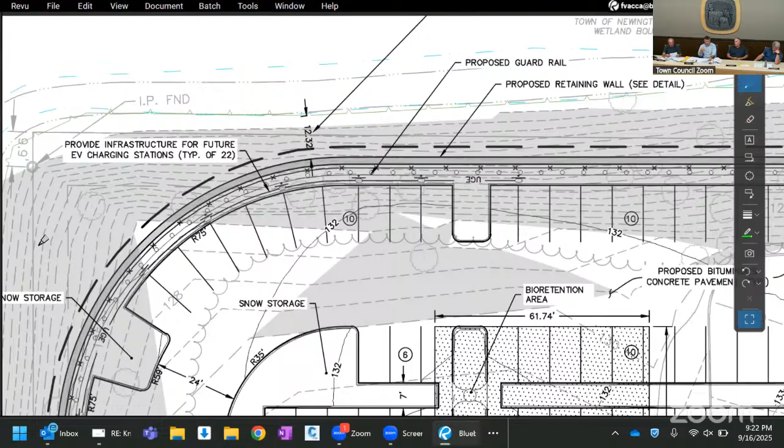All right. But to me, the real issue, and I think a couple of you said that, is the proximity of the wall to the water course, which complicates things. If it were closer in, we probably would have had a motion an hour ago. So, Commissioner Matt, you want to make the motion then? Yes, I make a motion to approve the application with conditions. You want me to read this out? Yes, please. Make sure your mic is on, read it into the record. Thanks.

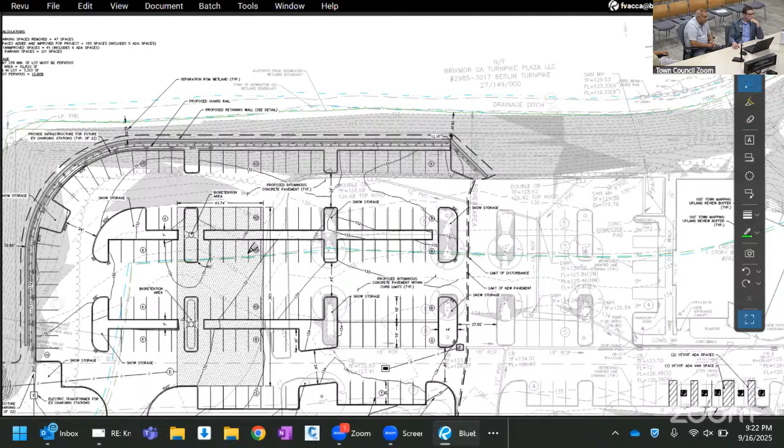I move to approve application IW 2511 at 2929 Berlin Turnpike with the 10 standard conditions per section 11-10 of the regulations and any other conditions as the commission may require as properly motioned and approved. Any other conditions the commission may wish to impose should be discussed and added to the 10 standard conditions. Okay, thank you, Commissioner Matt. Can I get a second on the motion? Second, Commissioner Paskowitz. Already have a second in the room from Commissioner Anderson. Thank you, Commissioner Paskowitz. All right, then I'll go around for discussion.

John, I heard your concerns about stressing the water course. I'm in agreement. I don't have a problem with parking. I think that's a fine use of the property, but I do have an issue with removing the vegetative buffer. And I do have an issue with not having a soil scientist review this and tell me what the impact is to the wetland. And I don't have any kind of environmental impact report from any type of expert telling me what the impact of this is. I've heard all the engineering aspects of this, and I don't have any issues with the engineering parts. But I do have an issue with removing all the trees and a vegetative buffer, disturbing the upland review area to this extent. And again, I'm going to fall back on not having any type of expert review of the impact to the wetlands and water courses.

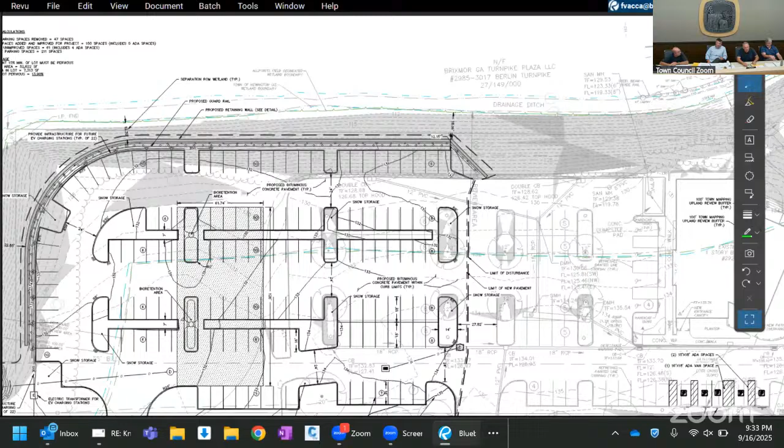Okay, so we have to go to another motion, the motion to table that. Yeah, we're done. Or should we ask them if they want to extend? No, it's all done. They cannot extend. We already asked them during the application process. Okay, you're right. Yeah, thanks. Sorry. Okay, moving on. Next item of business. Thank you, guys.

Public participation on non-agenda items. Okay, any member of the public wishing to come forward and speak? Seeing none in the room. Anyone online, Chris? We have no attendees and the usual suspects online, four councilors and Susan. All right, we're gonna go on to communications and reports, agent communications.

Yeah, I don't have a lot for you tonight. I have 2 items. Actually, it's 1 item. I have a complaint from a resident of Coachman Lane regarding a neighbor on Rockledge who erected a fence within the conservation easement. I had my staff visit the site and they can tell me that a fence was erected. And we are researching the restrictions of the conservation easement, but I believe this conservation easement was put in place by this commission at some point when Rockledge was developed.

So now this is a question of the devil being in the details. What language is in the conservation easement about what they can and can't do as a homeowner in there? So I'm just bringing it to your attention because it is a resident complaint. Okay, so you don't require any action? I'm just notifying you. This is informational. Yes. So we'll look for an update the next meeting on that one. Yes. Anything else for agent communications? No, that is all I had for this month. Town council liaison communications.

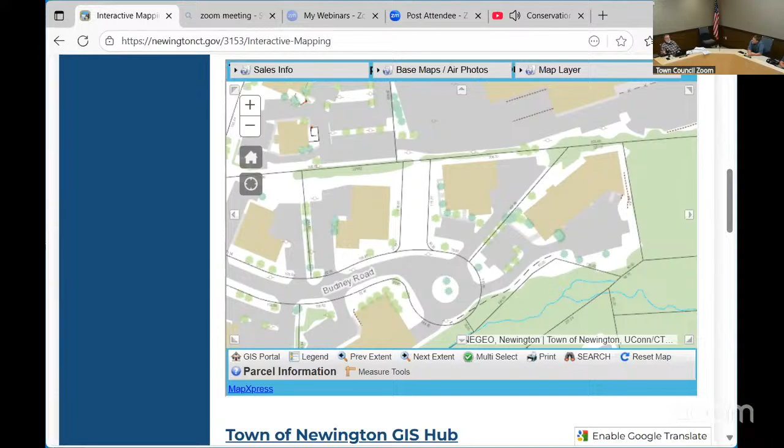It does start with the drainage components first. So the first sign of work will be replacing catch basins up and down Garfield Street. It won't look like a pedestrian project until we get to the mill and overlay. We have a couple weeks of replacing catch basins, putting in the hydrodynamic separator at the bus end, concurrent with the conduit that will cross under Garfield through the bus parking lot to provide the new lighting and security cameras. That was part of the application in front of these guys recently.

So all of the underground work comes first, and then the mill and overlay, the big noticeable ticket item, is probably only a couple of days of the 4 weeks of the project, the rest being the parking lot work and sidewalks. It's gonna be done by end of October. Really? It's Tilcon, they can do that. They're bringing in something like 5 different crews: drainage, parking lots, milling, overlay. And the council won't be meeting again until October 14th.

One item of information, not from town council, but TPZ: Kitts Lane. They had one public hearing, and another was scheduled for last week but put off until the next TPZ meeting. So that's still under discussion. Did they get much turnout? Maybe 2 or 3 people, but there were several questions and concerns from TPZ. It went on for several hours, mostly the councilors and the applicants. Alan's got his hand up again.